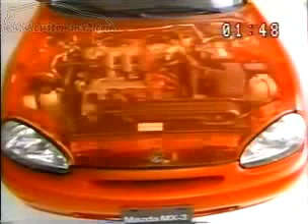And in Part 3, helpful pointers regarding the diagnosis connector, engine tune-up, and necessary test equipment will be presented. To begin, let's take a look at the components you see here. The MX-3 is available with a modified version of the B6 SOHC engine and the all-new K8 DOHC V6 engine.

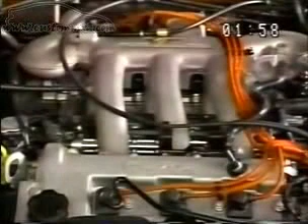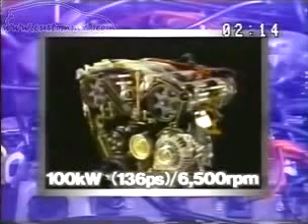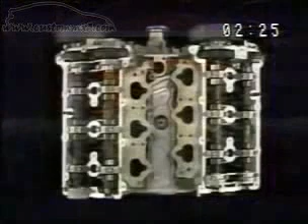This K8 engine combines excellent performance, unparalleled smoothness, and exceptional fuel economy. It is also one of the lightest, quietest, and most compact of currently mass-produced V6 engines. This all-aluminum engine features double overhead camshafts on each bank of cylinders, which operate 4 valves per cylinder.

It employs a direct drive mechanism for its overhead camshafts. This camshaft drive mechanism incorporates friction gears that fit tightly against the driving gears to prevent gear backlash and noise. To further improve its overall design and strength, the cylinder block is split at the crankshaft centerline. The upper block has cast-in iron cylinder liners, while the lower block has cast-in iron-bearing cap carriers, forming an extremely sturdy unit.

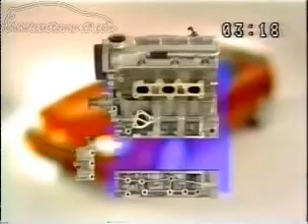Next is the suspension. The MX-3 was designed and built to display superb road handling by instantly responding to driver input and tracking with little noticeable body roll or sway. The front suspension is MacPherson strut type, and the rear suspension is Mazda's highly regarded twin trapezoidal link arrangement.

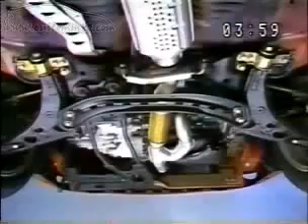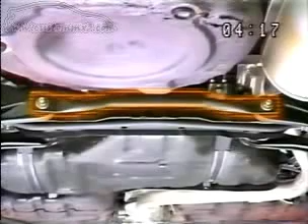A transverse member ties the front strut mount bases together, and a performance rod strengthening the rear suspension work together to improve the vehicle's overall stability.

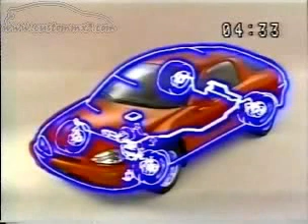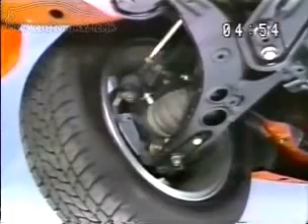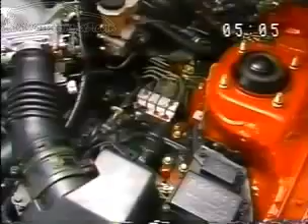The latest generation electronically controlled non-integral four-wheel type anti-lock brake system, like that found on the 323BG two-wheel drive model, is standard on the K8 engine-equipped MX-3. This important safety feature consists of the electronic ABS control unit, four wheel speed sensors and sensor rotors to monitor the speed of each wheel, and a remotely mounted compact hydraulic unit that regulates the hydraulic pressure to control braking.

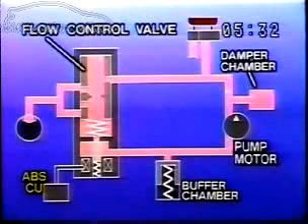Now let's see how this new ABS operates. The hydraulic unit consists of a flow control valve to control fluid pressure, a pump motor to return fluid in the system, a buffer chamber to absorb fluid pressure impulses, and a damper chamber to decrease pump vibration and noise. During normal brake operation, there's no signal from the control unit, so fluid pressure from the master cylinder goes directly through the flow control valve to the brake caliper.

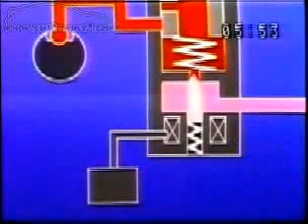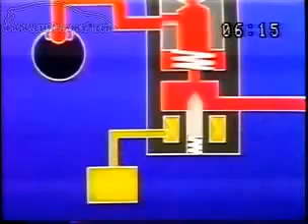When the brake fluid pressure becomes high and a wheel is likely to lock, the control unit sends a signal for pressure reduction to the solenoid valve. First, the solenoid valve opens to prevent any further increase in fluid pressure, and the pump motor begins to operate. Then fluid pressure pushes the flow control valve down to reduce the pressure in the brake caliper. When the wheel again begins to grip the road and increase in speed, the control unit causes the pressure to again be increased, beginning the cycle anew.

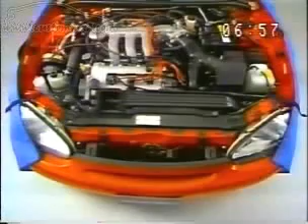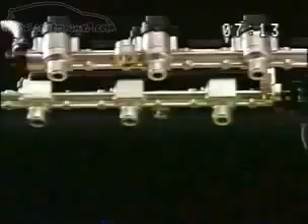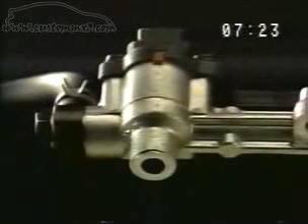To achieve outstanding smoothness and power, Mazda employs a sequential fuel injection system on the K8 engine. To make understanding of this system easier, let's see what the actual injection looks like as it occurs. This then is the actual injection while the engine is running. But please note, this is for demonstration only and very dangerous, so don't use this as a checking method.

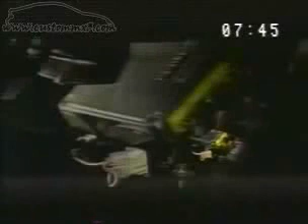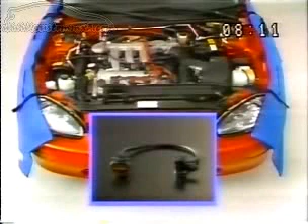This system is controlled by the engine control unit mounted behind the center console. For the ECU to control the basic fuel injection amount, the airflow meter and the intake air thermosensor output intake air amount signals. The crankshaft angle sensor, crank angle sensor 2, installed at the crankshaft, outputs engine speed signals. These three signals are sent to the ECU for the necessary calculations.

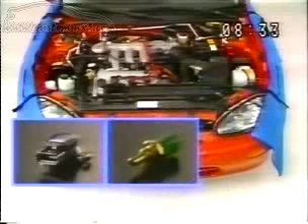The ECU also decides the optimum fuel injection correction amounts by using the throttle sensor signal, the water thermosensor signal, and the oxygen sensor signal.

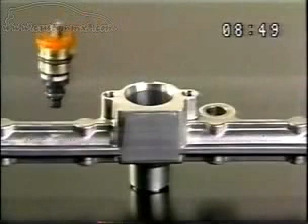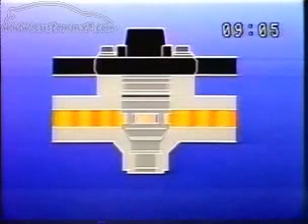To give better performance and prevent fuel vapor lock, side-feeding injectors are employed. This is because as the fuel flows around as well as through the injectors, they are cooled better for increased injection performance.

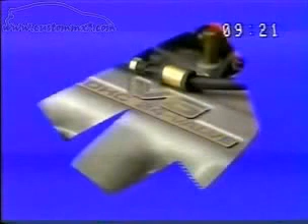The excellence of the K8 engine is enhanced by its air induction system, the VRIS. VRIS stands for Variable Resonance Induction System. Evolving from Mazda's dynamic supercharge effect induction system, the VRIS goes a step further. For this engine, the resonance and inertia supercharging effects are fully exploited in 6 zones within the engine's RPM range, instead of 3 zones as with the previous VRIS.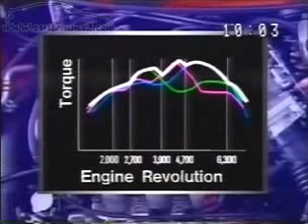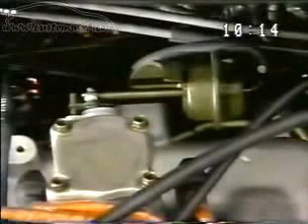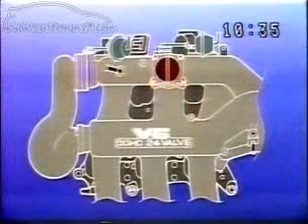The working of the various valves in the intake system controls this performance-enhancing operation. The VRIS thus ensures smooth and quick engine response.

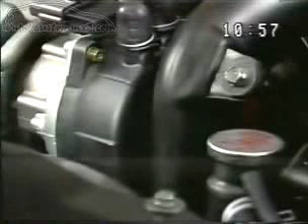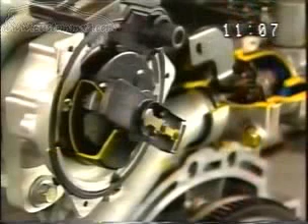To detect the crankshaft angle correctly, and for accurate engine control, the MX-3 employs a Hall effect type crankshaft angle sensor, Crank Angle Sensor 1, within the distributor. In the distributor, there are two sets of vanes. These are for the NE1 signal, and this is for the G signal.

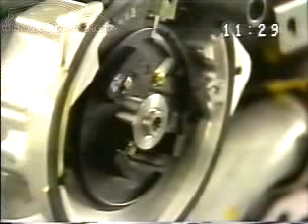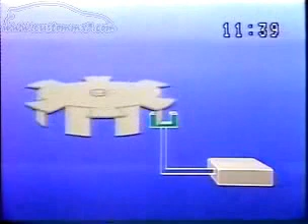The vanes pass through their respective Hall sensor. The two Hall sensors are this one for the NE1 signal and this for the G signal. When the engine is running, the vanes passing through the Hall sensors create the crank angle signal. When the vane is between the magnet and the Hall sensor pickup, there is no voltage. And when the vane is not between them, voltage is created. This type of signal is considered best for accurate input to the ECU.

For precise control of the fuel injection timing and the ignition timing, the ECU also uses another crank angle sensor, called Crank Angle Sensor 2.

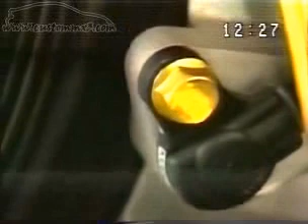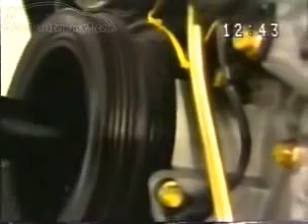Because the NE1 and G signals may display a small amount of error caused by stretching of the timing belt, the crank angle sensor, with 6 evenly spaced projections, is mounted on the crankshaft pulley. When the engine is running, this crank angle sensor outputs precise crank position signals to the ECU.

The exhaust gas recirculation system, or EGR, recirculates a controlled amount of exhaust gas into the intake manifold to reduce the combustion temperature and thus reduce NOx emissions. It consists of the EGR valve, the EGR position sensor,

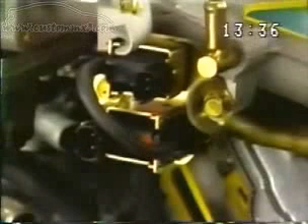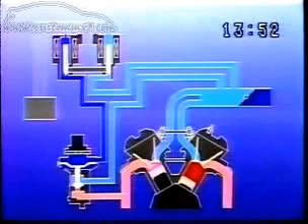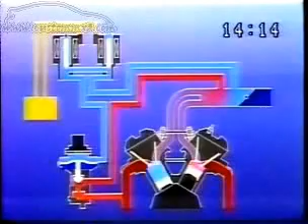and 2 solenoid valves. When the engine is cold, idling, decelerating, or operating at high speed or heavy load cruising, operation of the EGR is stopped to improve engine smoothness and drivability. During acceleration or warm-up, the amount of EGR gas introduced to the cylinders is restricted. During normal cruising, and at times other than those already mentioned, the ECU controls the EGR gas amount as necessary to meet the operating conditions.

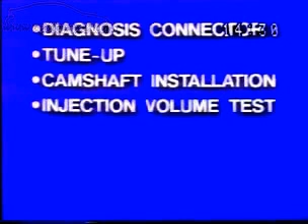In Part 3, we will consider a few important service points. These are the use of the diagnosis connector, tune-up procedures, camshaft installation, information about inspection of the injectors, oxygen sensor sensitivity inspection, and cooling fan system inspection.

Like other recent Mazda vehicles, a diagnosis connector is used for accessing self-diagnosis information and for connecting test equipment. Providing improved serviceability is the goal of this concentrated check connector.

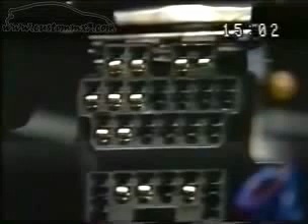One section of the diagnosis connector consists of 17 pins, to which the Mazda System Selector SST is connected. To check each function, turn the system selector to the specified number as shown. The other 8-pin section is used for testing individual components, in this case, the fuel pump.

Now let's turn our attention to engine tune-up. As an initial part of the tune-up, some important preparations must be carried out, after which the ignition timing and idle speed can be checked and adjusted as necessary.

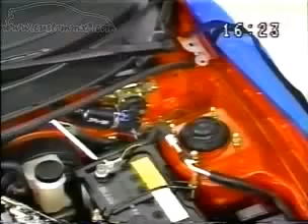In order to ensure that the engine speed is stabilized before beginning the tune-up, be sure to do the following. Always warm up the engine to the normal operating temperature. And be sure all electrical loads such as the blower motor, headlights, and so on are off. After this is done, connect the System Selector SST to the vehicle.

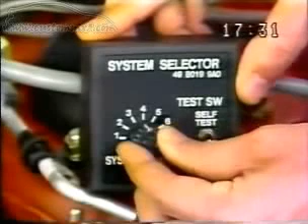Then connect a timing light to the battery and number 1 high-tension lead. Next, connect a tachometer to the diagnosis connector's IG negative terminal. Now set the System Select switch of the System Selector to position 1 and the Test switch to Self-Test.

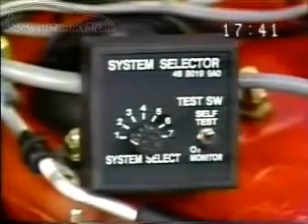We can now carry out the actual tune-up. First is the ignition timing adjustment. Verify that the idle speed is within specification. Then, using the timing light, check the ignition timing. If it's incorrect, loosen and turn the distributor to adjust it.

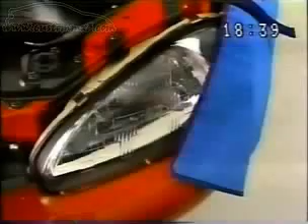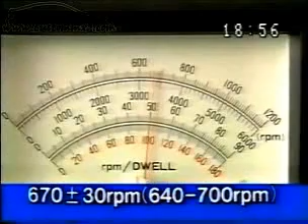Next comes the idle speed adjustment. Check to see if the idle speed is within specification. If it isn't correct, adjust it by turning this air adjusting screw.

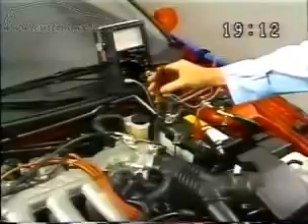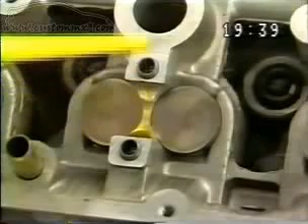The K8 engine features a unique camshaft drive mechanism, so installation must be done according to the specified directions in the workshop manual. But basically, first apply clean engine oil to the camshaft journals and to the saddles in the cylinder head. Then install the camshafts so that the alignment marks on the intake and exhaust camshaft gears are aligned.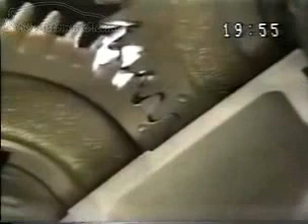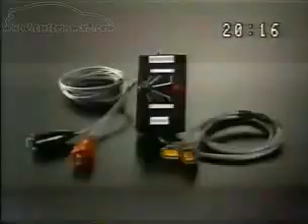The fuel injector harness has been changed to a unique molded type for size and weight reduction, better serviceability, reduced vibration, and improved reliability. To check the injectors, this new Injector Checker SST has been introduced. Let's look at how to use it.

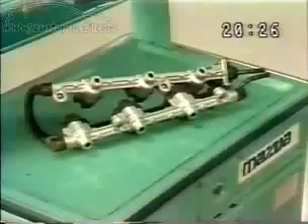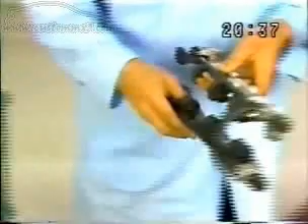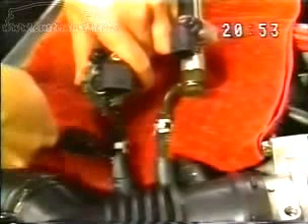After releasing the fuel pressure and removing the fuel delivery pipes, reconnect the fuel main hose and fuel return hose to the delivery pipes. Then, using a jumper wire, jump the fuel pump check and ground terminals of the diagnosis connector. These terminals are labeled FP and GND.

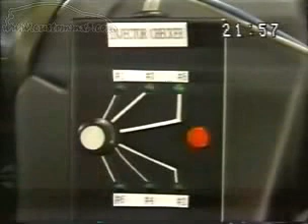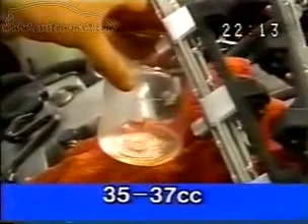Attach the injector checker to the injector harness. Turn the ignition switch to on. And set the dial of the SST for the injector to be tested. Now hold the test button of the tester depressed for 15 seconds and measure the injection volume. For this engine, it should be 35 to 37 cc's.

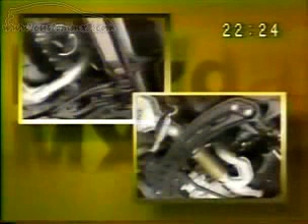Because there are two oxygen sensors in the system, they must be checked separately for accurate evaluation. Do this as follows. After warming up the engine, connect the system selector and self-diagnosis checker SSTs to the vehicle.

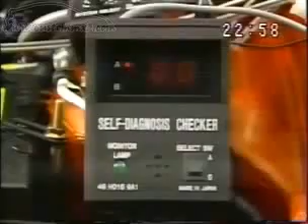Now run the engine at between 2,000 to 3,000 RPM and check to see if the monitor lamp flashes at least 8 times within a 10-second period. If it doesn't, the intake system and the fuel system must be checked. If they are found to be okay, check the oxygen sensor and the related wiring.

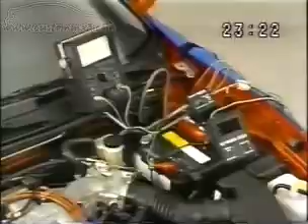The check just performed checks the left bank oxygen sensor. To check the oxygen sensor on the right bank, perform the operation again while depressing the brake pedal.

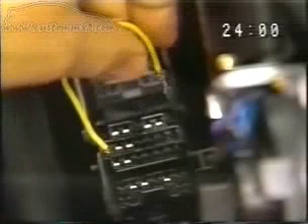Inspection of the electrical cooling fan system has been modified for improved serviceability. First, connect the test engine and ground terminals, labeled TEN and GND, on the diagnosis connector using a jumper wire. Then turn the ignition switch to the on position.

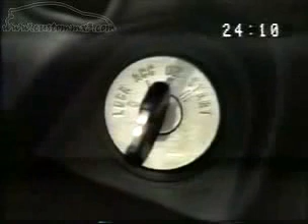Now turn the throttle lever to actuate the cooling fan. If it doesn't begin to run, check the cooling fan system.

That concludes our description of the main mechanisms and equipment of the exciting new MX-3. For more details, please refer to the MX-3 Training Manual and Workshop Manual.